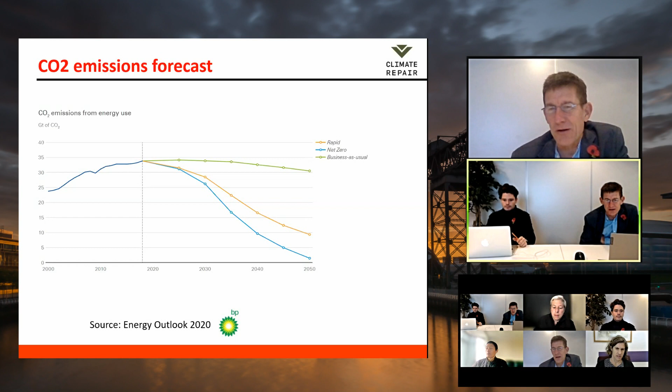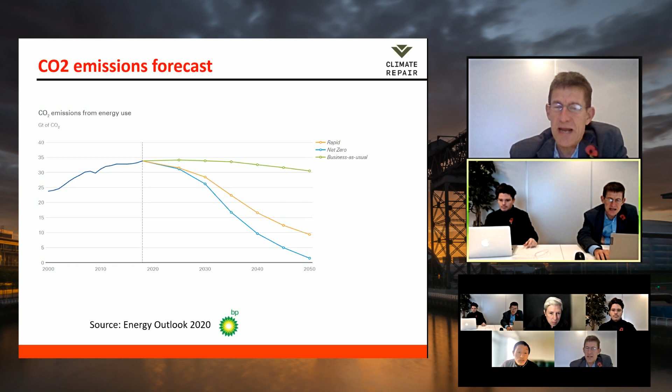But where we need to get to is a long way apart from that. We need to get to basically close to zero, if not zero, on a net basis by 2050 on a global basis. That's what we need to do, and the business as usual scenario is what scares me, because we need to think about what we can do to bring ourselves to either a rapid transition or a net zero transition by 2050.

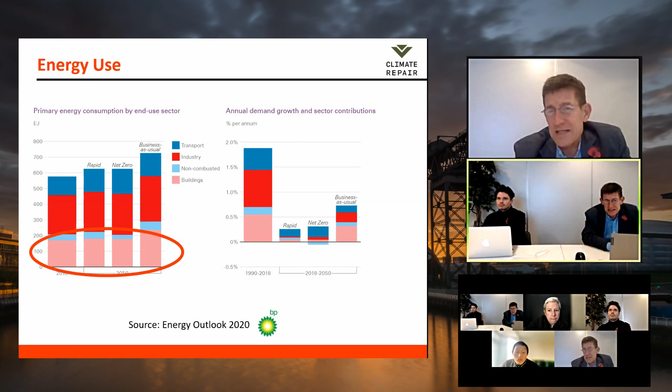It's quite helpful to look at the energy consumption by end use sector, and the pink bit at the bottom there is indeed the responsibility of buildings, and we represent a decent percentage of this. The chart on the right is something that really does concern me, because under the business as usual scenario, what it's showing is the fastest rate of growth of energy use we're responsible for. That's what the buildings, that pink bit on the very far right, is the biggest chunk in terms of percentage growth. So we've got to do something about it.

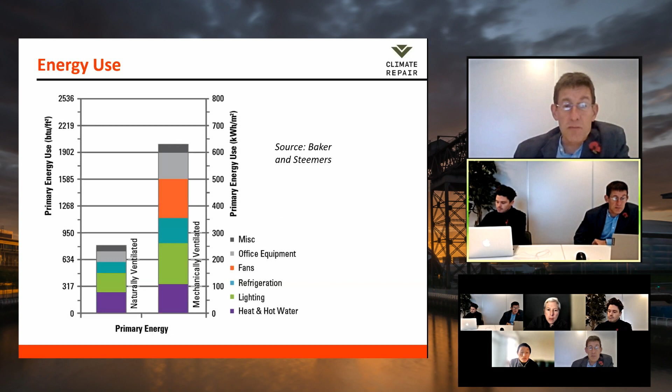So there are benefits overall. The one thing that does excite me is the light grey bar, office equipment. This is to do with behaviours—if you create a sustainable environment, for it to really work well you'd like procurement policy on where we buy things from, and policies regarding the energy consumption of equipment. Do we all have lots of monitors, or do we get away with less energy? That sort of behaviour we're trying to create with a sustainable office is alluded to by the difference between these two bars.

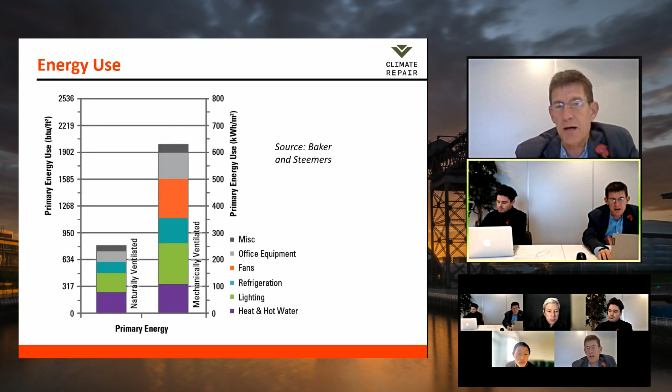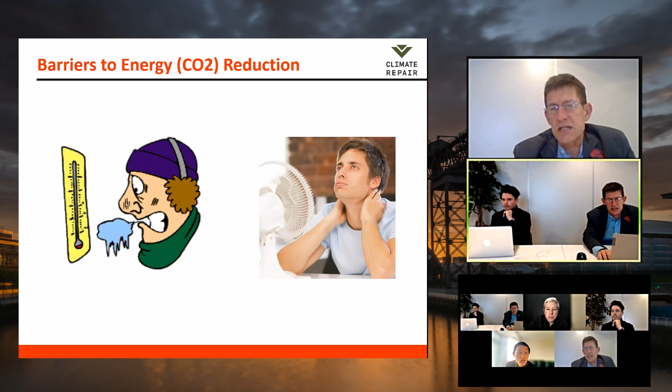So there's a lot that we can do. What are the barriers? The barriers to moving towards a more naturally ventilated building—certainly a purely naturally ventilated building—are fears of thermal comfort issues, like cold drafts in the winter, or risks of overheating in the summer. We therefore need to look at how we overcome those challenges if we're going to meet energy reduction targets by moving towards more naturally ventilated buildings.

But before we just think about thermal comfort criteria in winter and the amelioration of cold drafts, I wanted to highlight what we mean by thermal comfort. It's interesting that mechanically ventilated and air-conditioned buildings are usually designed to be within a narrow temperature band—plus or minus 2 degrees centigrade, for example, over the course of the year.

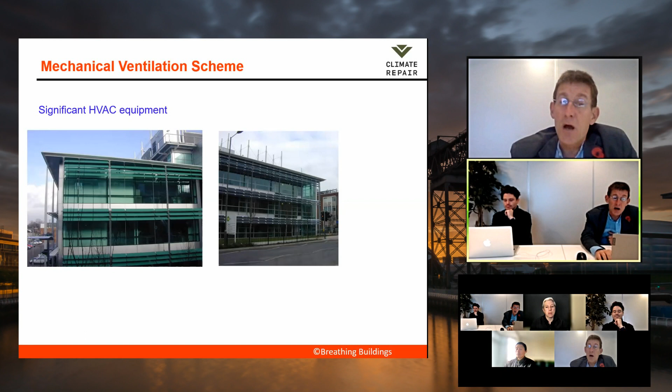This is a building we surveyed some time ago in southwest London, 3 stories, generally open plan. We're going to look at what happened in this building, even though it had lots of controlled equipment—chill beams, chilled ceiling, displacement ventilation, trench heaters, heat recovery systems. It had all the bells and whistles thrown at it, the engineer's playground, absolutely wonderful in terms of equipment. Was it able to deliver plus or minus 2 degrees centigrade?

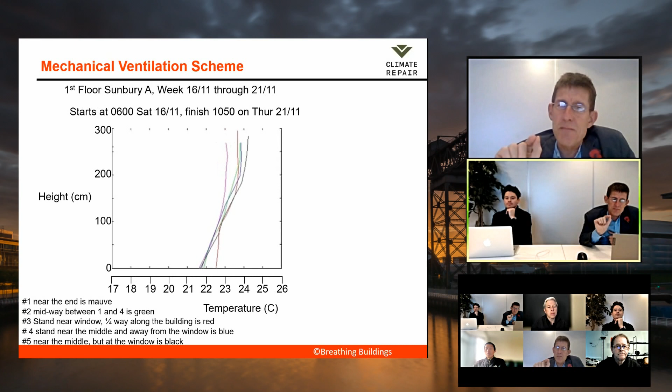So this is important because what we mean by thermal comfort, we just need to make sure that we don't make a rod for our own back, that we set conditions that are deliverable and achievable. And if we're going to set such tight conditions of, say, plus or minus 2 degrees centigrade, it's going to be really difficult to do that with buildings that are not air conditioned.

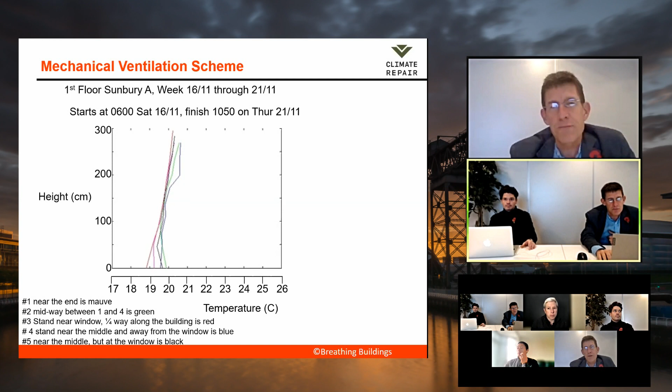But even those that are air conditioned, we're going to struggle with this. So perhaps relaxing and just being clear about what we mean by temperature criteria will be a helpful way of overcoming one of those barriers to how we then move away from just purely mechanically ventilated air-conditioned buildings.

One of the other things I wanted to indicate is that there has been a move, because of concern about buildings being drafty and cold, certainly in the schools arena in the United Kingdom, in naturally ventilated buildings now, where what constitutes a cold draft has been defined and it's been excluded.

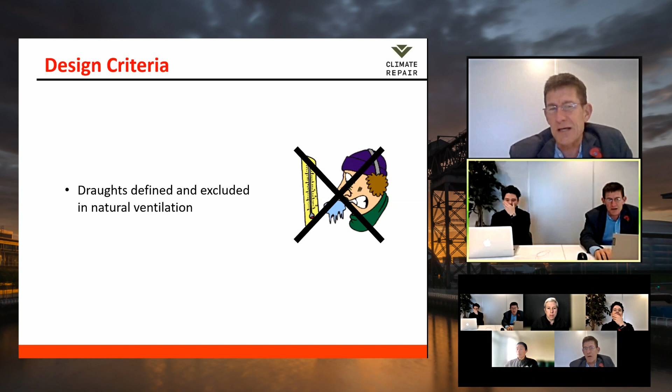It's been there for quite some time in mechanical ventilation systems, but not in naturally ventilated buildings. And that's been a really positive attribute regarding trying to ensure we're creating comfortable environments. It doesn't mean we can't do this, because there are systems designed to deliver this criteria, but it means we're overcoming the barriers to people's acceptability of naturally ventilated buildings.

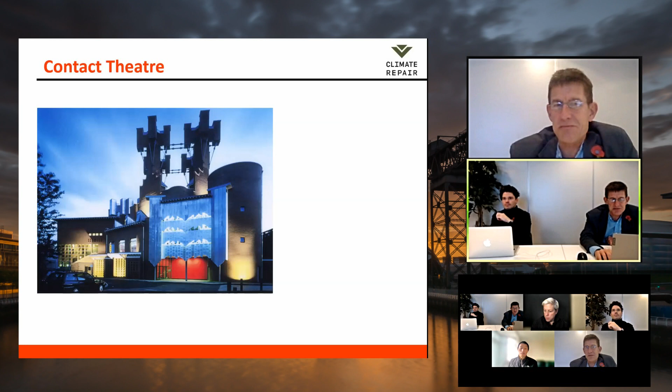Before I talk about the strategies we're going to suggest for reducing energy while also ameliorating cold drafts, I wanted to share some experience of looking at a building in Manchester, the Contact Theatre, which had some stacks on it.

These were natural ventilation stacks. The idea being that air would be brought in at the bottom into a stack and out through the top. This is what the theatre was designed to be.

And conducting water bath experiments, which is where we're building a scale model of the airflow in the theatre using water flows in a laboratory tank, performing an experiment trying to achieve dynamic similarity between the water flow in the experiment and the airflow in the building, teaches us something about the flow regimes.

So I just want to show what's going on here. We have a 10 centimetre by 10 by 10 by almost 15 cuboid representing the interior of the theatre, two stacks, a hole at the bottom. There's a heating element in the bottom to represent the heat gains in the space.

We immerse it in a large fish tank, shine light through it with tracing paper on the outside, and you'll be able to see the density contrast between the cold water and the warm water, representing the cool exterior air and the warm air in the theatre. So just watch what happens for these different experiments.

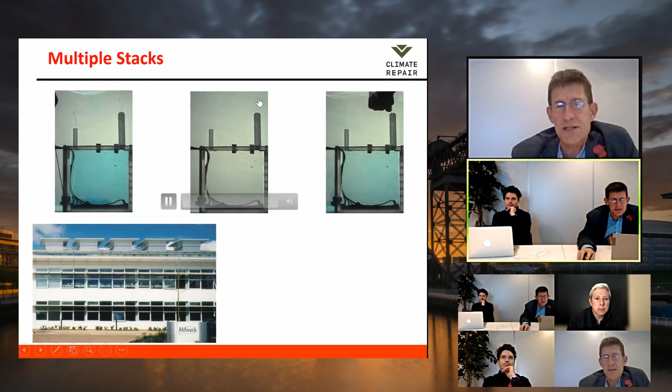The first one on the left, you'll see that the stacks are outflow, but for exactly the same geometric conditions on a different day, we were able to show that you can actually achieve a different flow regime where the right-hand stack here is indeed inflow and the left stack is outflow.

There's still inflow through the bottom. And then by perturbing that system, you can actually get it to flip, so that in this case, the stack flows have changed.

This was a surprise, although on reflection perhaps it shouldn't be, because in naturally ventilated buildings there's nothing to say you can't have inflow through a high-level opening. And when we look at older buildings, this has been happening for some time.

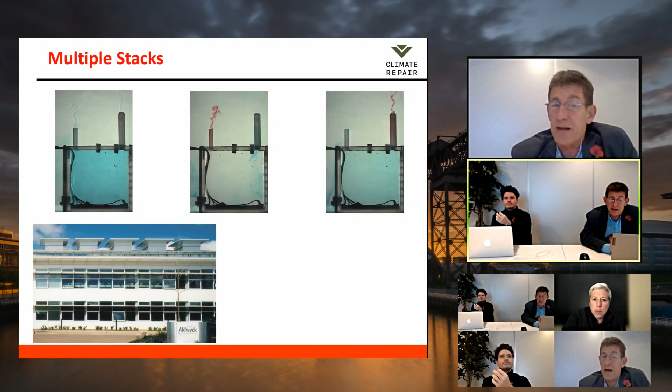The critical thing was the strategy being proposed was inflow through the bottom and outflow through the top. And in order to ameliorate cold drafts, even in the theatre, they had lots and lots of heating elements in the trench to make sure the cold air coming in on a winter day was preheated, even though the theatre had very high heat gains from people and lighting.

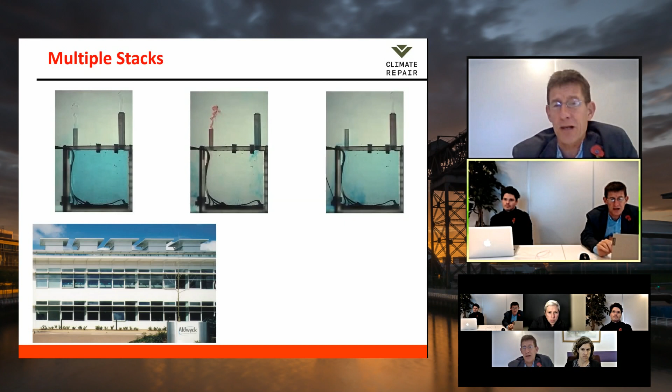Well, this taught us that although this strategy was the one being designed to, the one we actually wanted to use was where air would come in through the top and mix with enough of the hot interior air to ameliorate the cold draft. Thereby, instead of using heating elements to provide draft mitigation, we're using the heat gains in the space. And this was a sort of penny-dropping moment when we looked at what the energy savings were.

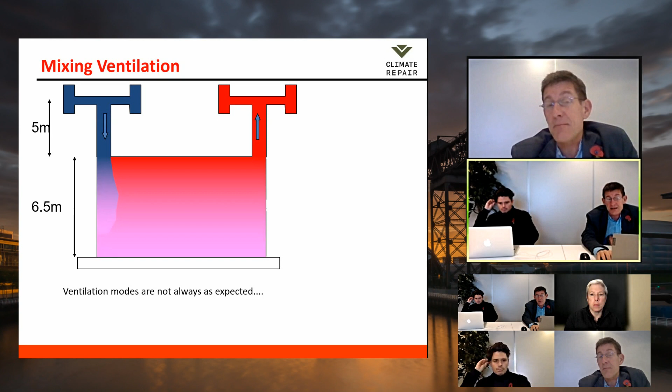We were going to be able to at least halve the energy consumption of a naturally ventilated building by changing the strategy from inflow at the bottom with preheating, to inflow at the top with mixing. This was absolutely phenomenal in realizing that we could create not only draft-free naturally ventilated buildings, but much, much lower ones.

This idea was then explored further with some laboratory work, and then we went into the real world by getting this idea implemented in practice.

So this was a prototype system that we built and installed in a primary school near Cambridge, and we then delivered thermal comfort to the children.

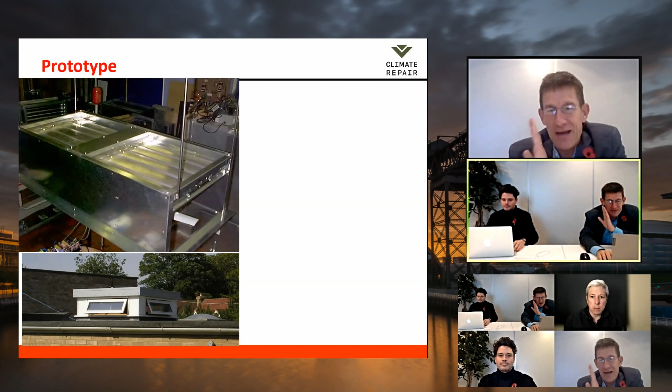At that time I had small children, primary school children, 5 to 7 years old, and some of them were sat underneath this particular device, just with their regular sweaters, on a cold winter day. The classroom was well ventilated — we had that checked with carbon dioxide monitors — but they were not freezing cold. The heating was all being done by the people, the IT, lights and solar, not by heating elements.

Having demonstrated it, we then took this to market and got systems installed in a lot of schools. This was the first commercial project that we did, at Queen Alexandra College in Birmingham.

These roof stacks on top — for those of you into design, you'll see they're actually not at the apex of the roof. So they're not being used to use the wind to drive the ventilation flow, especially in winter. What's driving the ventilation flow in winter is a buoyancy flow.

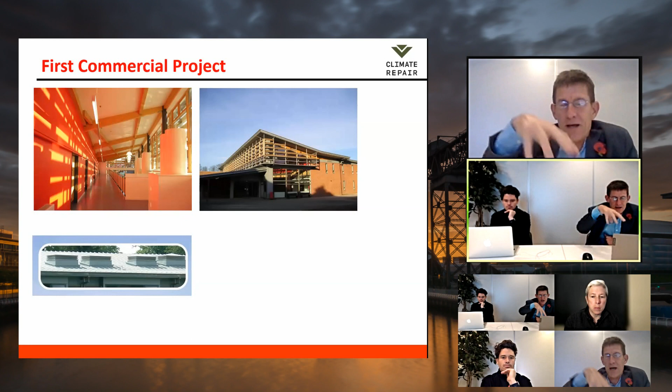Half of the shafts are full of cold, dense air coming in, and the other half are warm shafts with hot air leaving. So we're able to ventilate the buildings, but with some assisted mixing using very small amounts of fan power — ceiling fans just to disrupt what would have been a coherent plume of cold air dumping on somebody's head, disrupting the incoming air.

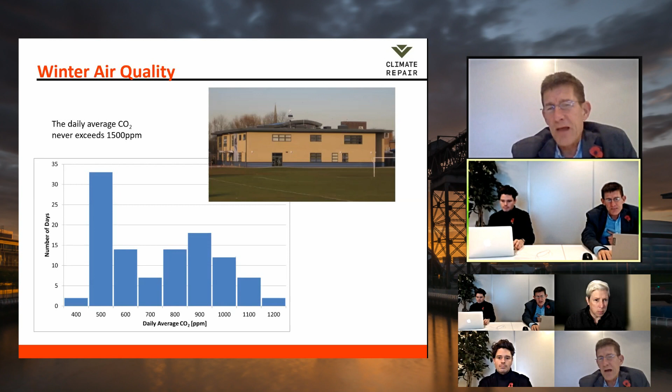These systems were then monitored, and we showed that we were able to deliver the air quality targets mandated by the building regulations and Building Bulletin 101, the code in place at the time for schools, requiring the daily average carbon dioxide to be less than 1,500 parts per million. This was delivered in all of the schools we were monitoring, and it was very satisfactory from an air quality point of view.

But most pleasing was that we then measured the energy consumption of these schools, and this is what we achieved. If you look at the green bars on the right-hand side, these are the heating bills for these two schools compared with, on the left, typical practice and good practice.

The Port Regis one on the far right is particularly interesting. It was heated with a heat pump, and we weren't able to separate the heating bills from the lighting and IT bills, so this is the total energy consumption of the building — and it's still way less than what would have been typical practice for heating alone.

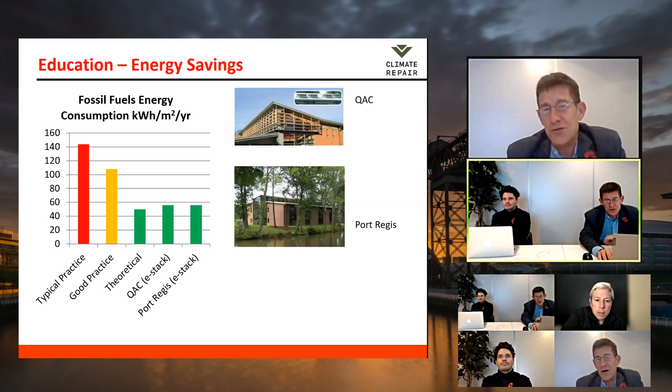So you start to get a sense of just what opportunities there are by getting the strategy right and then working with regulations that say we're going to remove cold draft. The winter condition was really, really helpful.

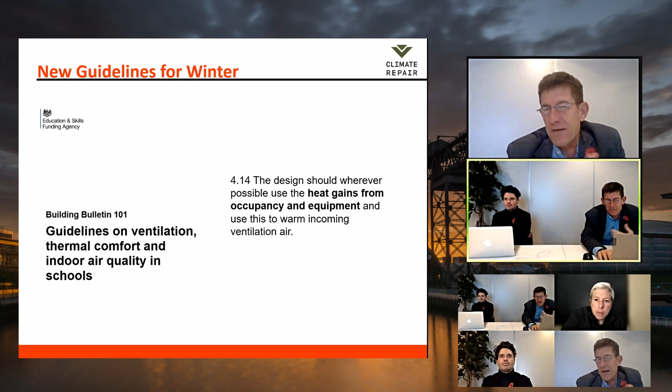This was launched in 2018, where this statement was in the revised guide to Building Bulletin 101: the design should, wherever possible, use the heat gains from occupancy and equipment to warm the incoming ventilation air. Clearly you could still put in a heating system, but it should only be used after you've availed yourself of the opportunity to use heat gains from the others.

So that was winter. Let's talk briefly about summertime. The big thing here with some of the new guides is that they basically looked at what do we really mean by overheating.

There are two factors. One is looking beyond just air temperature, to operative temperature — because if you can cool the surfaces in an interior space, and you're exposed to those, you get radiative cooling. That's the great thing with a lot of the design criteria now for summertime overheating: TM52 with CIBSE, and ASHRAE have got similar guides.

It's about trying to use the night cooling opportunities, creating interiors which will then help absorb some of the heat. So we're all hot bodies, and we will radiate those.

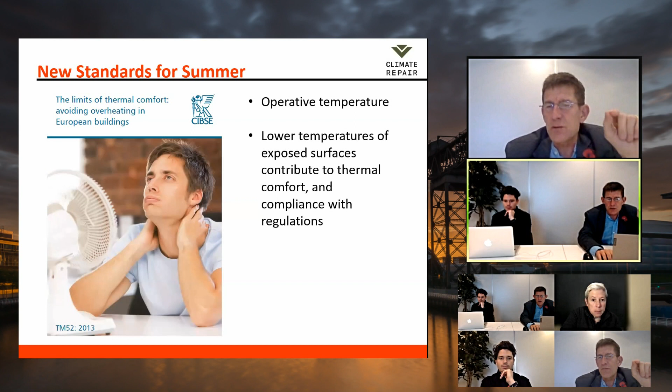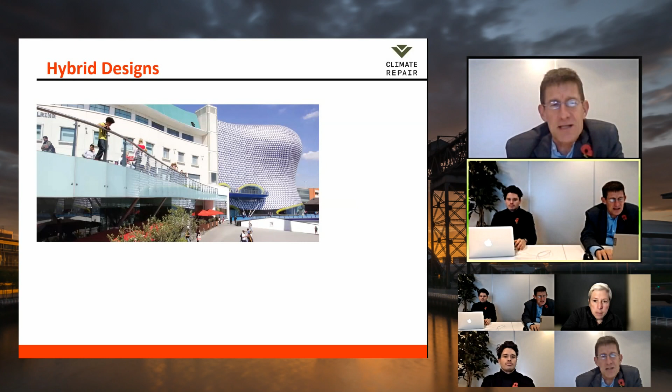That's a way of trying to avoid just relying on air conditioning. And lastly, I wanted to share that you can't always do it in a purely naturally ventilated building. So I'm a massive fan of hybrid designs where you do whatever you can with natural ventilation. It might mean some parts of the building can be naturally ventilated, whilst others have to be mechanically ventilated.

Or you have a building that's part naturally ventilated for some of the year and part mechanically ventilated. So this is the Bullring in Birmingham, the Selfridges Mall, and there the main thoroughfare is naturally ventilated. The retail units around the outside, which have much deeper floor plans, are mechanically ventilated. But it's a low energy overall scheme.

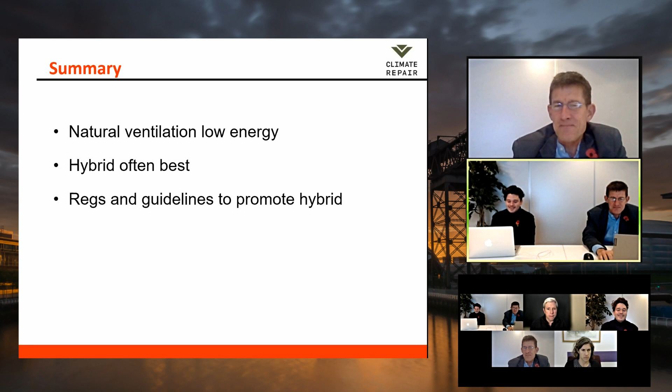I think a very practical question from Don is: how long is needed to compensate the investment of installation from reduced heating bills, do you think? That's a really good question.

Nearly all of the projects that I dealt with, the capital cost of the buildings was no higher than the capital cost of an alternative mechanically ventilated, air conditioned building. So it wasn't a case of having to look for a payback period. The payback period was often zero. In other words, it was a cheaper building from the outset.

If you look at the typical costs for mechanical ventilation, air conditioning systems and building services, you get to a decent chunk of the overall cost bar of a building—many tens of percent. A third of the building, maybe not quite half, but often a third of the capital cost can be associated with plant. So if we don't have to install all of that equipment, we can often end up with a cheaper building.

Another question: ventilation of buildings near the equator have issues with humidity to deal with as well. From your research, are there any strategies to promote in these kinds of areas?

So humidity is a very, very important factor. And if you are in an area where it is high humidity for a very large proportion of the time, then I'm afraid mechanical ventilation, because of the dehumidification aspect needed to make the interior environment satisfactory, is probably where you need to go.